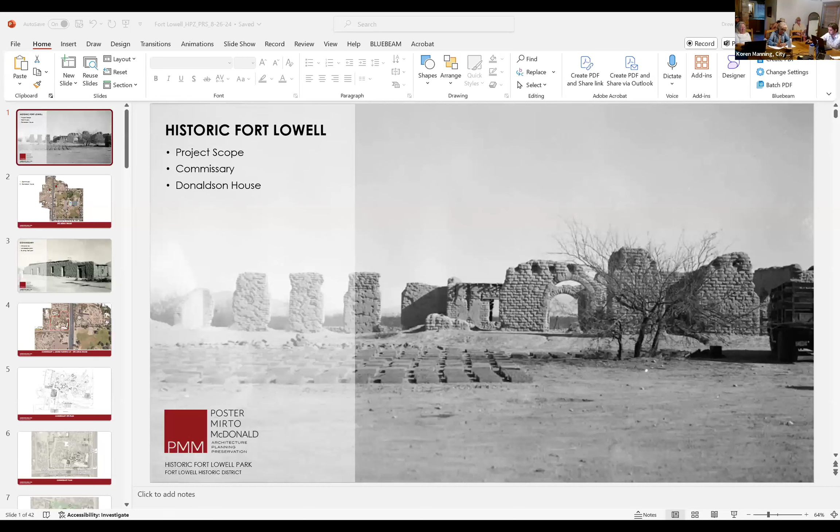Hi, we have someone else who has joined us. Introduce yourself. I'm Julia DeConcini, I'm on the board of the neighborhood association.

Can everyone online hear me? I'm kind of across the room. Yes, I can hear you. Perfect. Should we turn on the bright light? This one? Yeah, pull it. Okay, all right, way better.

All right, we are here to discuss two projects here in Fort Lowell. Poster Mirto McDonald was hired by the city and Pima County in an IGA. The county has volunteered to help out on this project because they have a very thriving historic department, and they've been guiding us and helping us along the path. Both of these buildings are historic and part of the Fort Lowell Park, so they are receiving 407 bond money. The money must be spent on both Donaldson and the commissary to completion, and that is the main focus of this project.

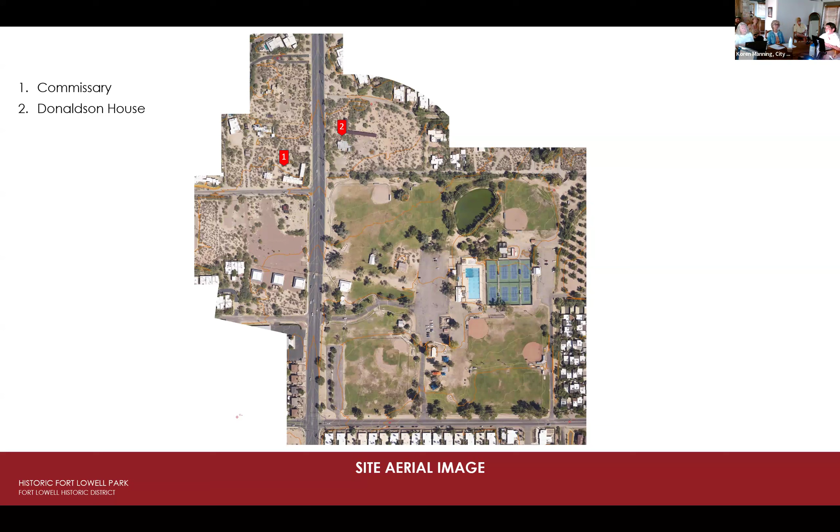It's unknown. The last photos we have in the historic archive are 1977 photos of the Donaldson House. We use that as a basis of design, and you'll see some of those photos in this presentation. We've tracked it up to about 1995, the last time it was used, when it was renovated into a health and wellness center that was also kind of a children's museum, and later moved after this.

So the commissary, we'll go through a site overview, the landscape plans, and the building floor plans with you.

Here's the commissary and its property line. It closes in the Clinco property, which is just north of here. They have an easement along the west side. It's a driveway.

Here's the landscape plans. Part of the design was to keep the integrity of the existing space, but provide a space that could be a community area for future use, having events like weddings, bar mitzvahs, different social events. They could also still be a part of the park.

All the paths you see in this design are maintained, basically what's existing now. The idea is they will create a walkway using decomposed granite, stop people from walking in the already developed desert areas, and then repopulate the desert with native plants based on the Fort Lowell planting guide as well as what's already there.

We're working with Wilder Landscape Group, who's doing this project. In the front here, based on feedback from everyone, we've placed the delivery truck, which could service a future cafe that's unknown. Right now the city has an RFP out looking for future users of this space.

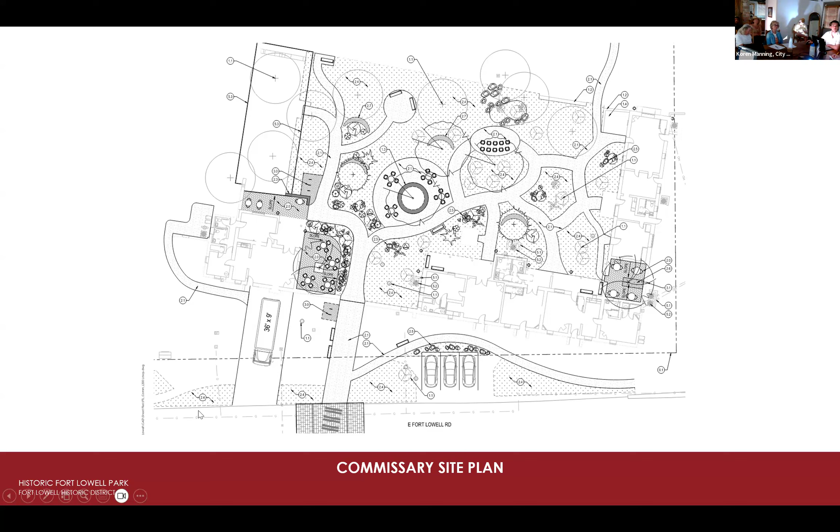Down at the bottom, you can see there's a raised elevated crossing. Unfortunately we cannot get that to line up with the property based on surveys provided by the city's traffic engineers. The raised elevated crossing needs to be located at the highest point along the road, which currently we haven't lined up with our survey based on the information we have, but it's somewhere around this area. We'll see in the next photo.

There's a historic ring in the middle of the property here, and it's a rock ring. Our plan is to maintain this rock ring. It has a date on it, 1949.

Who's the person's name who probably lived there and made that? The tree was living up until 2017. We think the water table and its age just got to it.

Our plan is to remove that tree and put a new tree in, maintaining the ring, but inside the ring we're actually going to dig down and put inlets to bring the water into that space instead of away. The light green represents all the planting that will no longer be walking space or desert area.

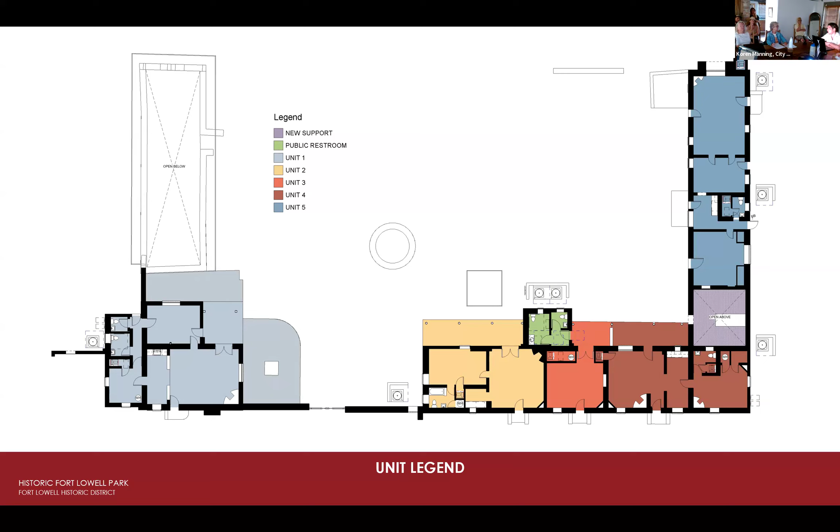So I'll walk through these. This is the ADA restroom, and this is where we'll be making one physical change on the exterior of the building, which is this door in the photo to the right. That door is not wide enough, so our plans are to widen it to meet ADA standards, and we're probably going to change the lock set. Right now, we're thinking we might be able to add material to the door to save it and make it meet our 36-inch requirement.

Does an ADA door have to swing open? It doesn't necessarily push, but it has to have a certain lever, like a hand lever for the doorknob. It doesn't have to be electric. If the city feels they want to do that, they can, and there are wireless options for that.

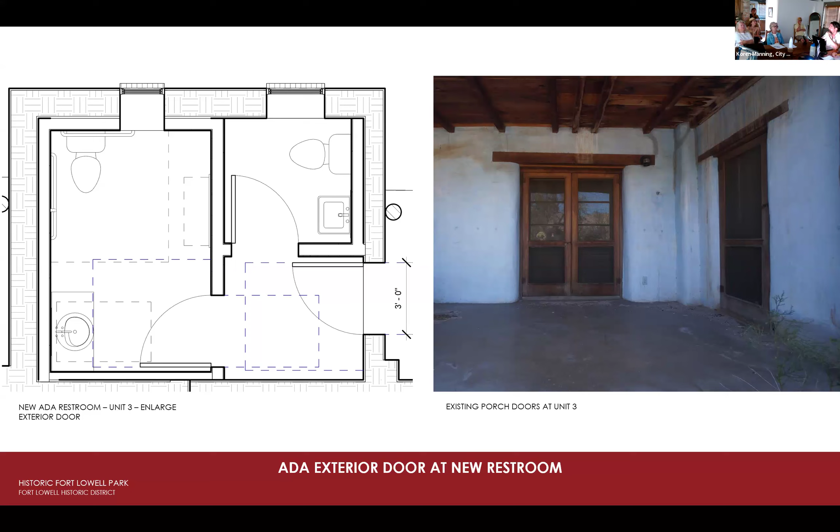So this is where the exterior addition comes in. This is the current structure that's there, which is a lot uglier than what we're proposing—a swamp cooler built on two CMU columns holding it up. Most people don't see this because it's buried in a jungle or desert.

Our plan is to create a small wood frame closet that needs to meet a certain R-value for insulation so the machine works correctly. Then we'll stucco it to match the building, and for the roof, we're going to provide a corrugated roof to match the corrugated roofing we've found in some of our historic photos—the porches in the courtyard had corrugated metal. So our plan is to bring that back, even though the roofs have been redone; they'll just put a new metal roof on there.

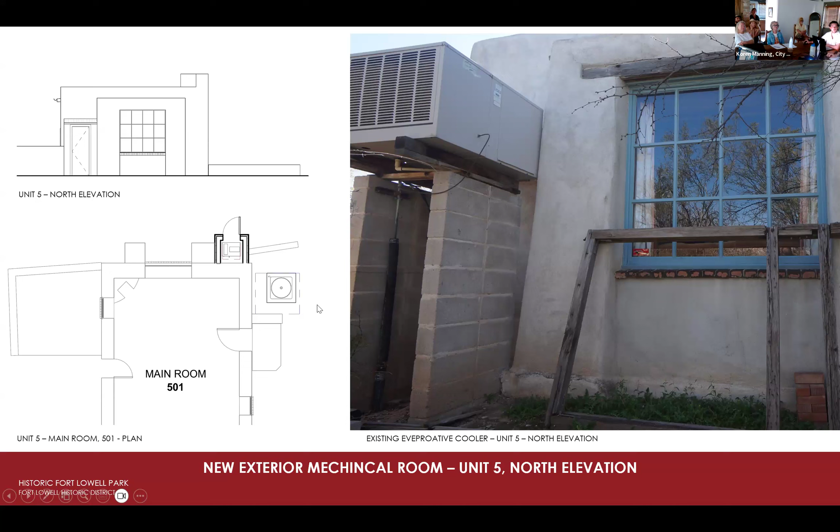That's a priceless picture. Right, this shows the city to some good effect.

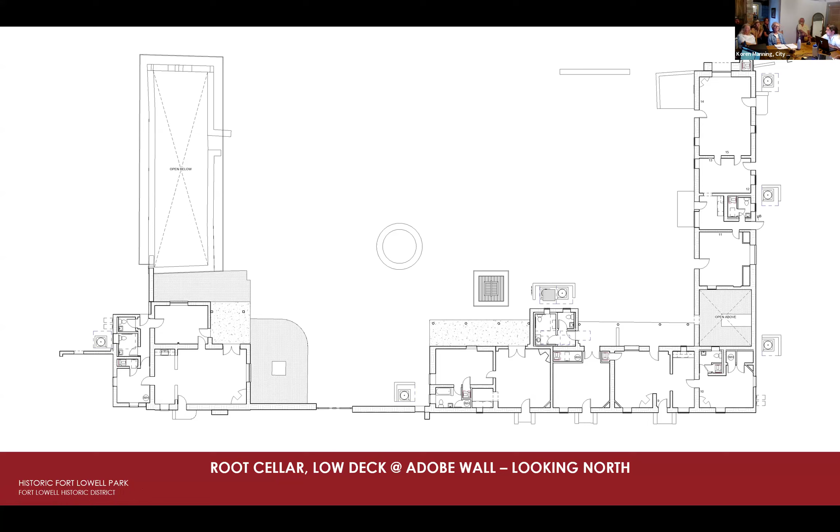I have a couple questions about the truck loading. Back to that, and then David's been... I think we addressed David's. I can answer that. David, that basically got value engineered out of the project, 'cause every time we did an iteration - 25%, 50%, 90%, 100% - the project has been estimated by Durazo Construction. We've done some of the work in the park previously, and that's sort of fine-tuned our scope.

And that's how we've moved forward to where we're at. We're already over budget for both of the buildings together. The city is sort of scrambling to figure out a way to meet these needs, but the parking lot expansion got abandoned. I don't think she's talking about that - oh, you're talking about the truck loading area. No, we were talking about David's first comment, the parking question.

So then how do we move forward if you don't have parking? Well, we have the whole city park too. The city has parking requirements, right? Do they have parking requirements adjacent to this? This is a very complicated permit project. We're getting permitted by the county - the only section of this that's been permitted by the city is through this historic idea. So you have to go talk to the county, and the county would approve using the lot crossing and the parking.

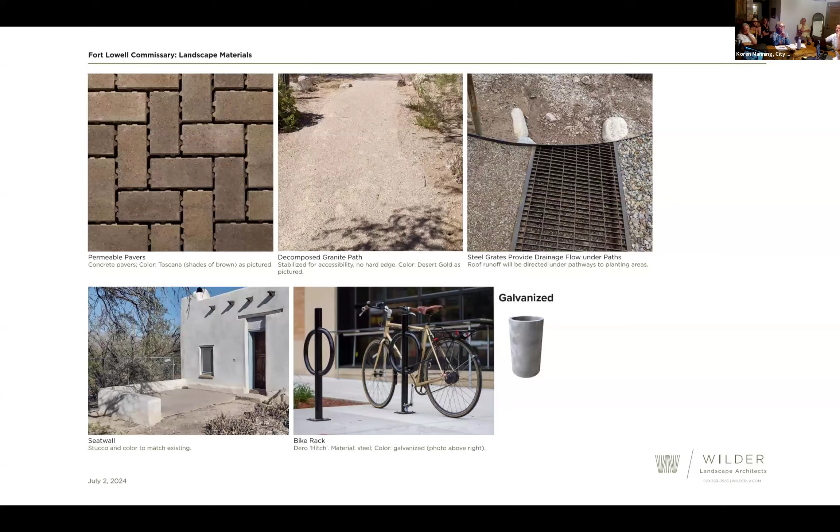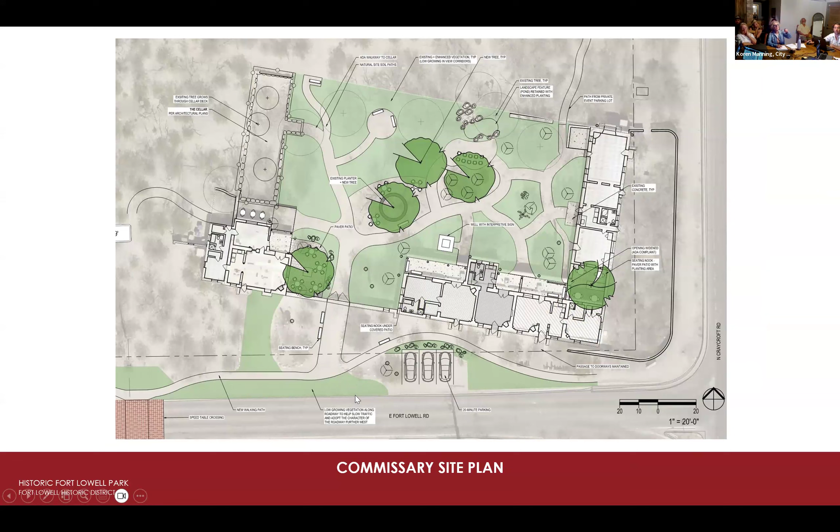That is the main, this will become the main foot traffic, pedestrian. You see, the landscape architect has separated it from the road using a green barrier, which is the plan, by pulling the walkway back from the edge of the road. This is an earlier plan, the plan with the drive off to the side.

Right, it's changed, so now it's a direct access across Fort Lowell to that pedestrian entrance. This is gonna change based on what we've gathered in the past two weeks—it's gonna end up further, being here, but then they'll use the path and come in that main pedestrian entrance. It'll be kind of this nice walkway with the landscaping to enter.

And this goes out to y'all—I just have a feeling that the drive access for the delivery truck could still come off to the side as opposed to being on the front. And yeah, it might be 15 minutes, but I leave it to my colleagues, there's 3 of you here. There's 2 components, and we need to—any other discussion about that?

None, Dave doesn't have anything. Margot, nothing. Well, what were you saying, the very last part? You heard the delivery on the side where it was originally proposed? Yes, to keep it there.

And if you look now, the delivery truck goes over the walking path to the building, and instead of being off to the back, the parking lot goes over the walkway. The existing parking lot on the south side crosses the walkway—yes it does—but it's the one on the north side that I was considering taking into account.

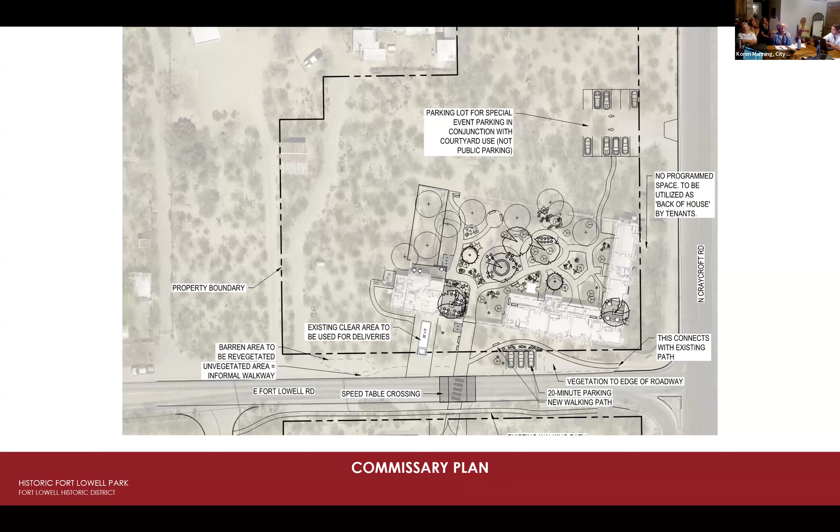If I could offer some additional information, not an opinion: there is a mound of unknown origin that sits essentially under the area marked 'clear area.' It's raised about 2.5 feet. Mounds on historic sites usually are not something we want to mess with, so putting a driveway through that area would take some research.

According to the Atkins white paper, this spot is the trash site. If you go in the back and look at this adobe wall melting away, there are pottery shards coming out of the wall. Whether they used dirt from that pile to build this entire building, I don't know, but putting a driveway through there might entail a 3-month archaeological excavation that would slow down everything.

I think it's important to consider preservation of the landscape as well, not just structures. Preserving the landscape means leaving that open spot there, even though the desert back there could easily be modified. We can vegetate all this, but preservation doesn't just include structures in my mind, it includes everything around it. Agreed, and that's the basis of the current scheme.

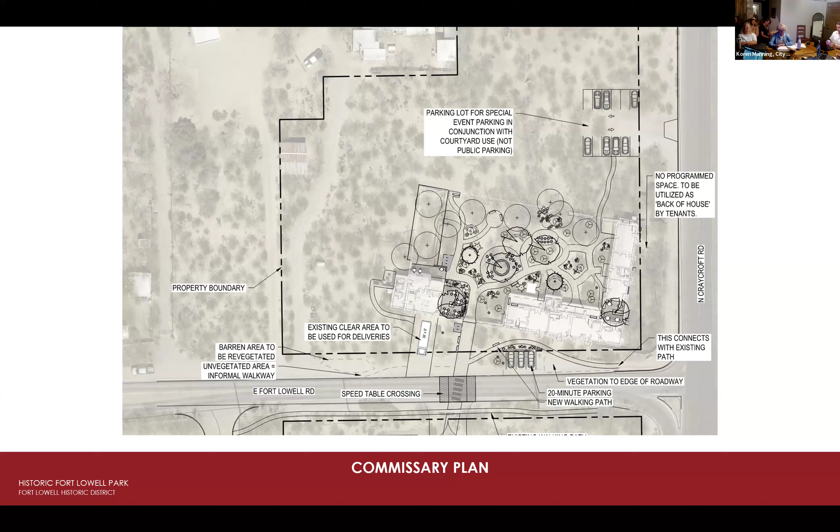We can do a vote, unless you want to discuss further - that's up to you. Anybody want to discuss this? I don't. Okay, all right. David, in favor of this? Yes. Margot? Yes. Rich? Yes. I'm in favor as well. So it passes unanimously.

You didn't like my wishing well, though. Didn't get in, did it? You did - if you know it's gonna work, they're gonna throw money in.

Just keep going. Should I do the lights again for the Donaldson House?

I'm sorry that we have to leave. Thanks for letting us sit in - I'm sorry you do too. We're just with our kiddos, so thanks for letting us sit in. We'll connect to the Zoom and catch up with the rest of the meeting, and appreciate your input very much. Thank you for all of your thoughtfulness. It's on recording if you want to listen to the whole thing again. I will, I'll listen to it and take notes, on repeat. Thank you.

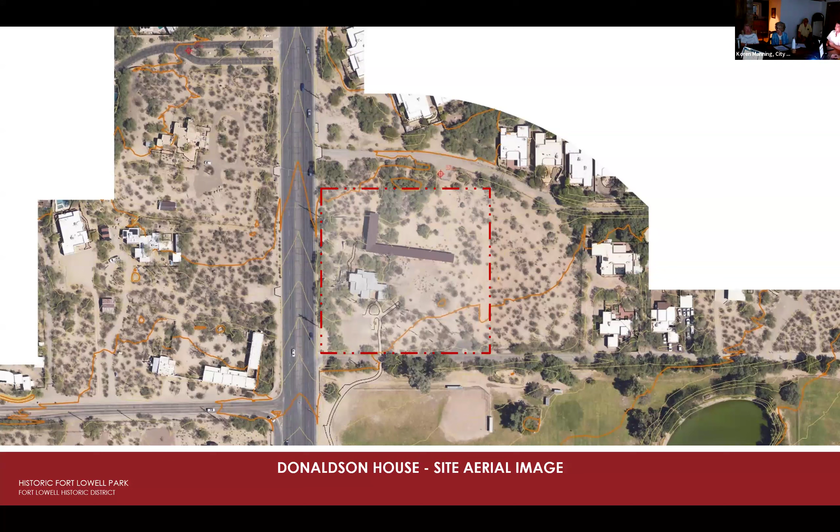So here's the site - the Donaldson House sits on the site with the historic corrals in the back, which is the L-shaped ramada. That ramada overhangs the existing, or what's left of it, adobe wall. Just so you know, that is part of our scope of work - to do a sort of sacrificial plastering of that wall. I'm an architect, so hopefully it's not religious.

It's sacrificial. So here's the current plans for the new scope of work. This is an existing parking lot - the lines have surely faded away, but that's what's there. All the walkways are pre-existing. Everything on the site - there's not much changed on the site as a whole.

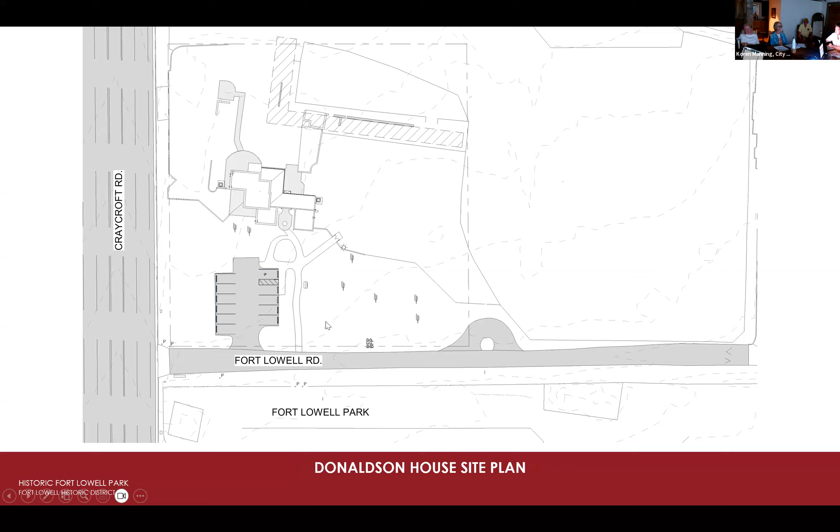So the vision was this was the Hardy Donaldson house, and the plan was to renovate this into a set of office spaces. Those of you who participated in the RFP or RFQ know there were some questions about it being used differently, which the city had agreed to. But the plan is just to provide office spaces and comfortable outdoor spaces that exist in the back.

The plan with the landscape architect was basically to leave it untouched. There's so much growth in the back that we're actually going to use selective removal. There are a few non-natives that have found their way back there that we'll definitely remove. There are quite a few existing dead trees that we're planning on leaving, as long as they're out of harm's way, because they still provide a natural space for birds.

The main issues we have with the site—we've done a hydrological study—are that the water from the park is supposed to cut through this walkway, run along the edge into that small grate there. Over time, we're not exactly sure if it's a combination of the surface changing in the park as well as the storms we've been receiving getting greater, but we now have a large sheet flow that moves this direction across the site. It bottlenecks in the back, runs through the back, and has deteriorated all of the walkways. We'll see that in some of our photos.

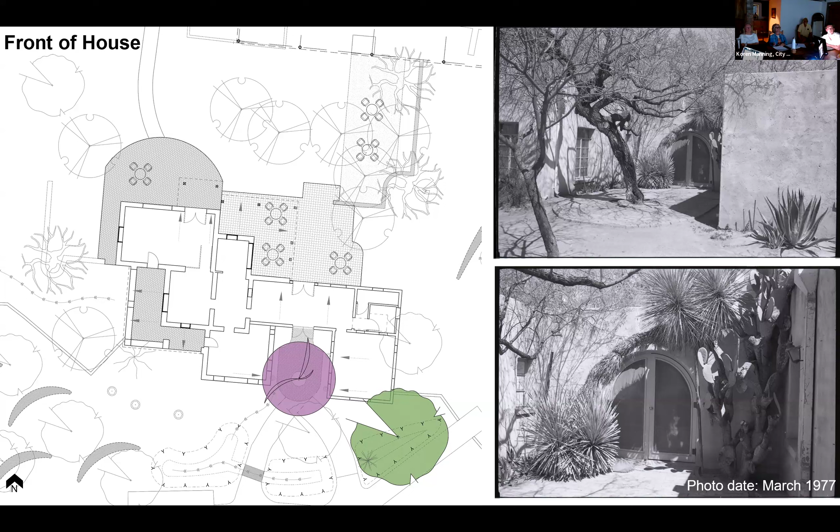Those are the two trees we'll be adding to the front. Here's the existing condition, as you can see—the water getting trapped in the courtyard has badly damaged that east-facing wall.

Is the original door behind the boards? That is the original door. Yeah, so the original door was actually, we think, swung in, and it also had a set of screen doors. Our current plan for this door is to treat it as kind of a gate or shutter, and it will remain there. We're going to create a frame so it doesn't fall apart anymore, with a top metal edge to protect it. The idea is that when the space is being used, the doors will swing open.

They'll probably lock in place with some kingpins, and then we're going to design an arched door to fit inside of that—a little more modern, because the existing door doesn't meet the correct height, which is 6'5", and we're required to have 6'8". So this is something we're bringing to the design review to try to encourage them to allow it.

We have two other doors on the front facade under that porch that meet the requirements, so they could be used as ADA access, which might require us to create some kind of path to that porch. But most likely, the height doesn't really affect the ADA person—it affects tall people.

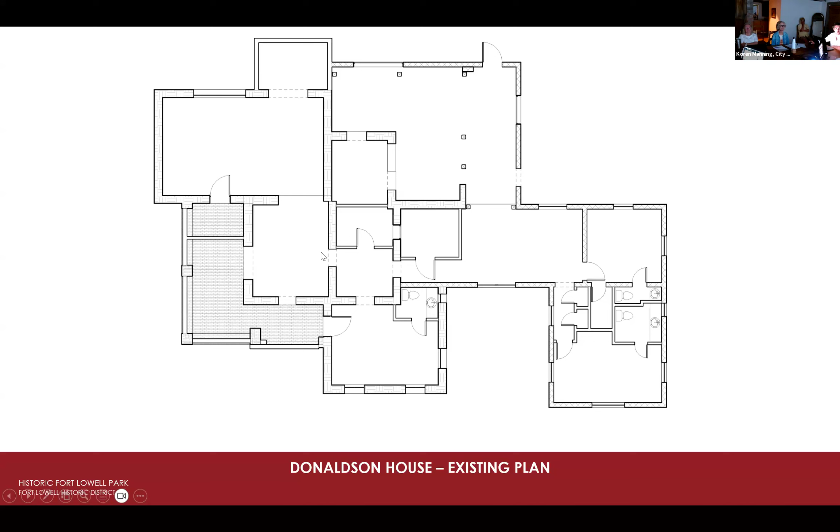And this was the kitchen. So our plan is to remove this CMU wall, which I'm guessing was built in the 70s, to open up this original porch once again. And this will become the back door, so when you walk in, you'll see back into the back patio and the porch.

This was an overhang porch that then got closed in. It's a framed section and it's just rotted away and disgusting. We're going to remove that too.

So the north, this is north, correct? Top, yes. This is the part that has that cool arch door, where is that on here? That arched entry, right, okay. So this is the south, this is facing the park. Yeah, sorry, I didn't have... That's okay.

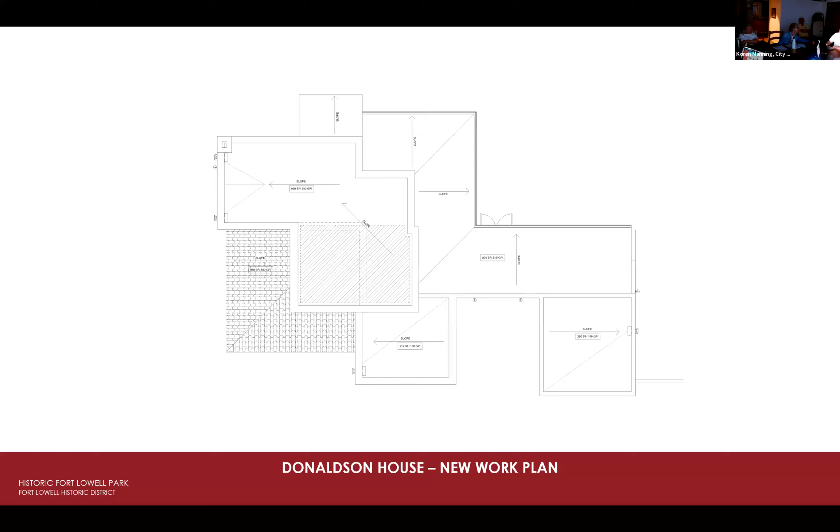We need to fix this wall that's failed along here, I think it's 20 feet, and then there's a section right here that's failed too, that we anticipate fixing. We need the water to come out of Fort Lowell Park and go along the alignment of Fort Lowell Road to Craycroft and stay away from our site.

Is there anything we could do to help you with that, as a historic district board or neighborhood? We probably could eventually, but not right now. The other problem is they're not willing to just go in there and dig because it requires an archaeologist, and you've got ruin walls along that edge, on the corner, all the barracks.

And trash pits. So I wanted to ask a question about one of the comments you made first. Do you think that original adobe piece was part of the fort? We don't know, we sort of suspect it would have probably just been like one room. It could have been a storage space.

We know the stables part, do you know? Yeah, John Donaldson, we've done an interview with John Donaldson. He said part of the house was there when they bought it. I believe those were something like that. I mean, it would make sense, it's right near the corrals, which we know what they're for.

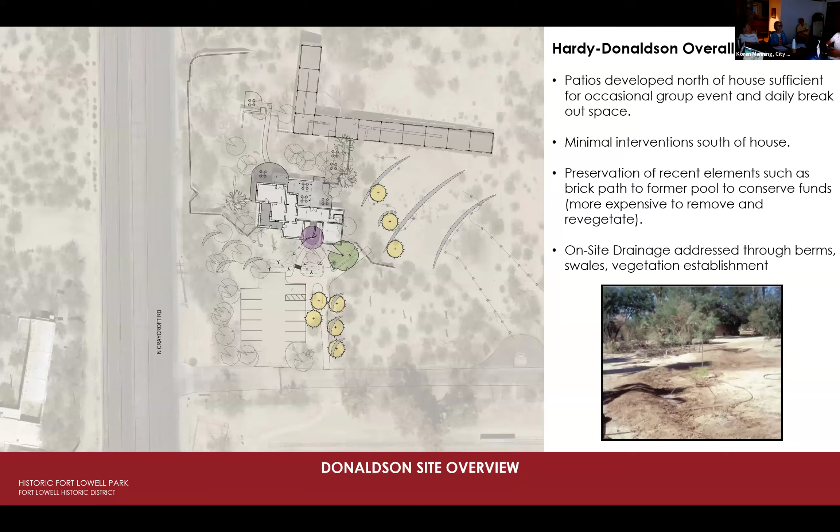The doors and windows - do you have samples of doors, windows, and colors? Let me show you this. We have all the existing windows right now, everything's in there. The only ones we don't have - let's see - what's that one window, these two? So those are the examples of the two windows we're bringing back.

And this window here, we actually still have the frame, and it was just a fixed glass. Then this spot right here, there is a window - that is a historic window. It's sitting inside the building, and we're just gonna reuse that and put it right over the sink where the doorway is.

This actually, there's a window there, so our plan is just to put a fixed window that matches this one. But all of these are steel around the whole building - this is all steel.

The fixed picture window, the one that's on the bathroom - yeah - and that you're gonna replicate again is not on the kitchen? Oh, it's a kitchen. It's just a frame, wood frame that was there, and it's the original. With a frame? Yep. And how big is that window? Not very big, I would guess maybe 42 inches wide by 24 inches high.

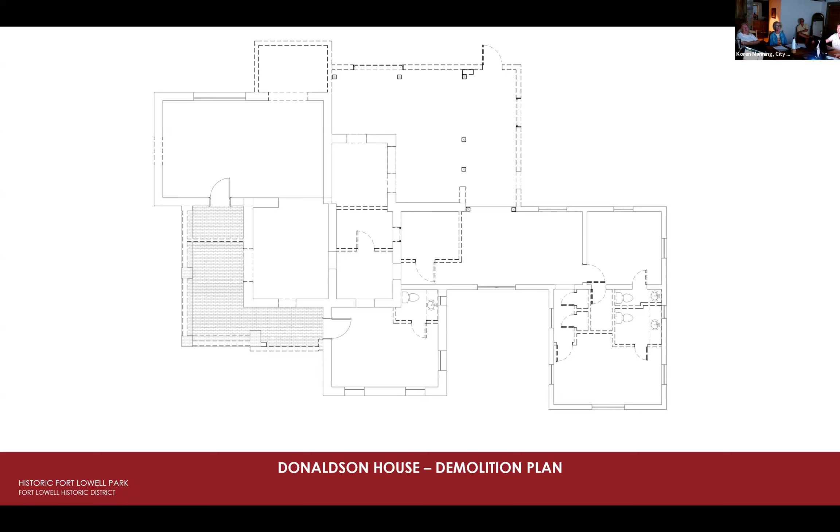So I think this is a little challenging because there's some details coming up in the design around the front door and the windows. The front door is the only new thing we have options here, and like the kitchen flooring system, just the actual visual design details and choices.

What do you mean by the flooring system? Well, like you said, we haven't picked one, but we're gonna pick one. We're gonna figure something out for the door, but we haven't quite decided what we're gonna do yet. And for me that's okay, I just feel those details should be coming back to the board when the time comes. The board is here specifically to be approving these minutiae and details for the building, so yes, the overall plan with opening up the porches is working, but it was really hard for me to understand what type of window was going in, and now that's also getting replicated in another window.

Fair. These plans are so hard to read because they're meant to be printed on architectural drawings I think. So what page, is it one of the plans 600s? Is there a way we could put it online so you could bring it up?

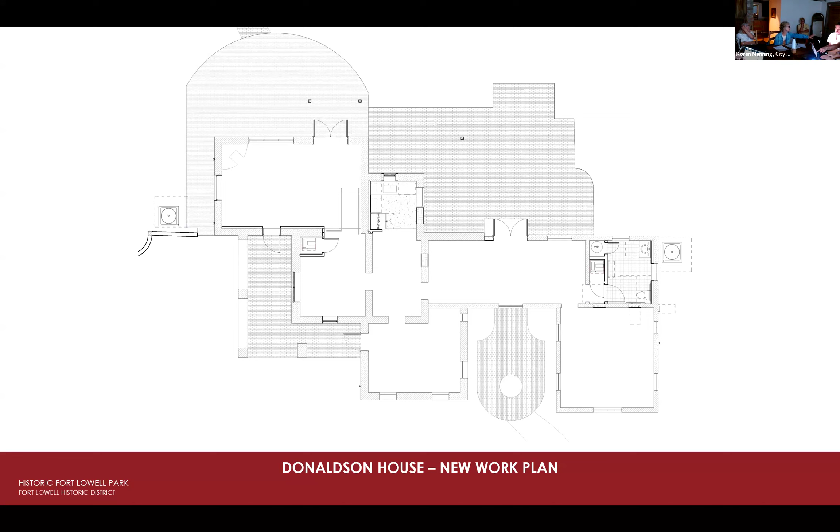And I have to say that, given they're not changing the exterior door, I kind of don't care what they do on the inside. I'm not very concerned about the floor coming up because it doesn't change the exterior and what I'm gonna be seeing. This is a public building so I understand the inside is part of our purview. I understand, I'm just giving you my frame of reference, and I think the window becomes a key piece, but if it's been there...

I think it's the exterior doors. What are the other exterior doors? Okay, so some of the doors are... you bring those up, yeah I'm working on it.

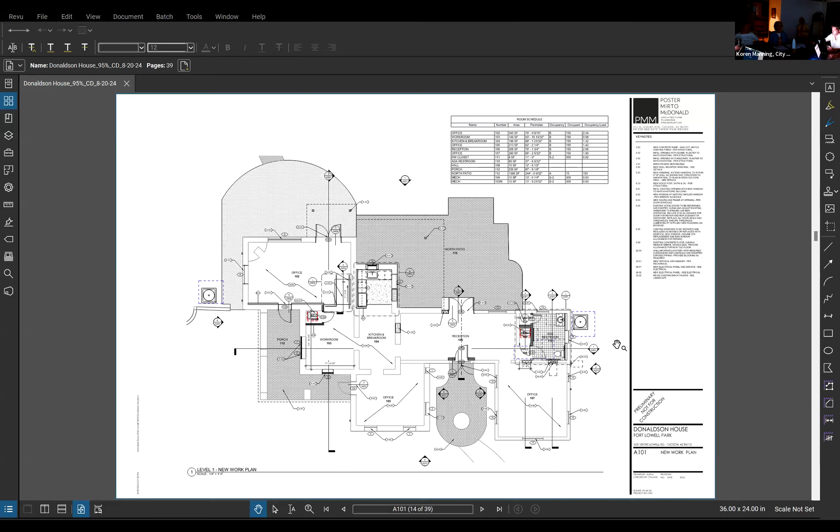You guys are putting us to the test with the double submission, with both packets being enormous.

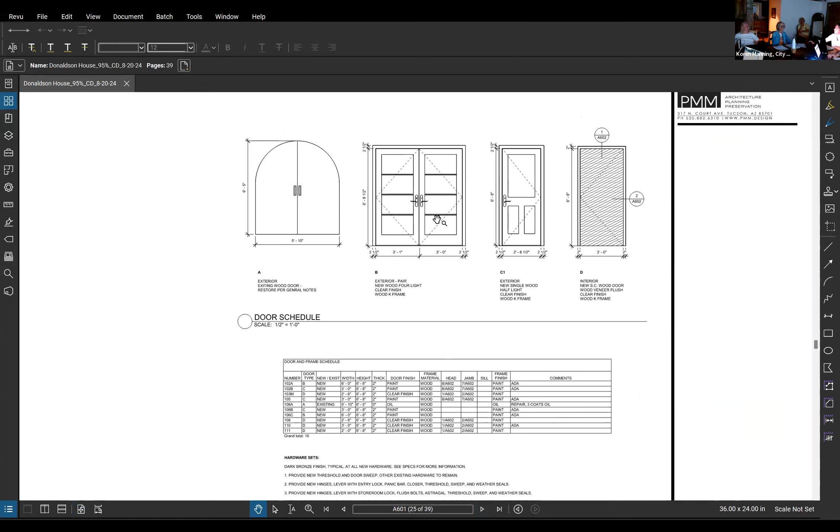So these are the doors. Choices are single light on the single doors and then a 4-panel light on the back door, 2 back doors, because they both face north. So the north-facing doors are like French doors. And when you call it a single light, I don't know what that means. Single light up above, there's one glass window, a glass pane. Okay, and the one on the far right is the bathroom door, an interior door. And then the arch door.

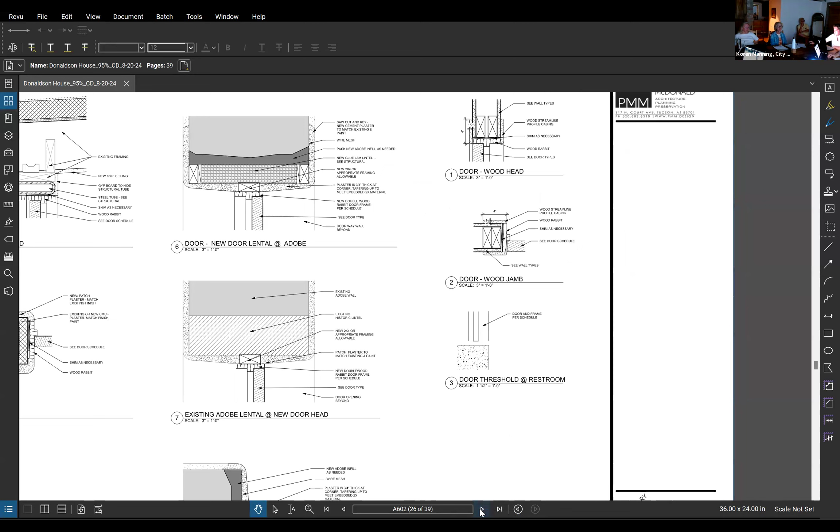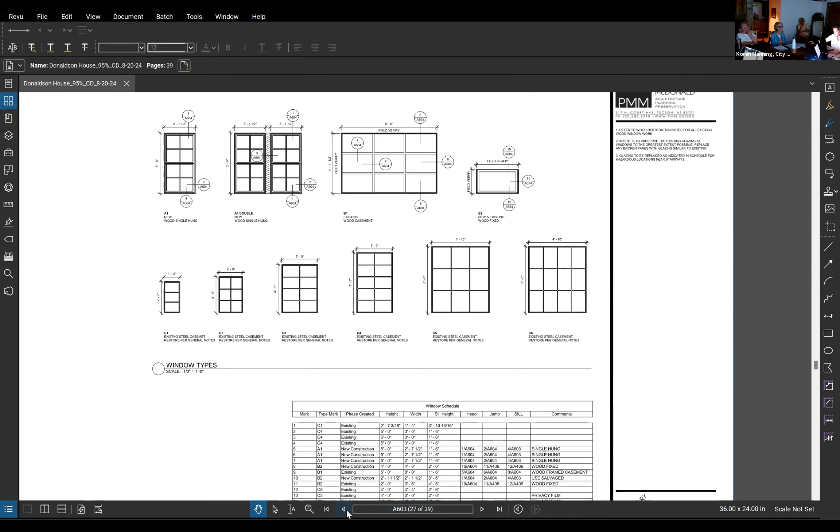There's a door here, I don't know why it's got cut off, but the door goes to the same height as the window. And then the window's actually up at like 48 inches, and it's gonna be a non-operable wood frame window.

Well, we have the frame, we don't know what's there. It looks like it was a fixed window going into the wood frame that exists, but it's planning to not replicate the proportion, you almost never see windows wider than they are tall. Do you think it was a hole for heavy equipment at one point? No, it's detailed out with two pin lines through all the woodwork, and it matches with the whole frame of the door.

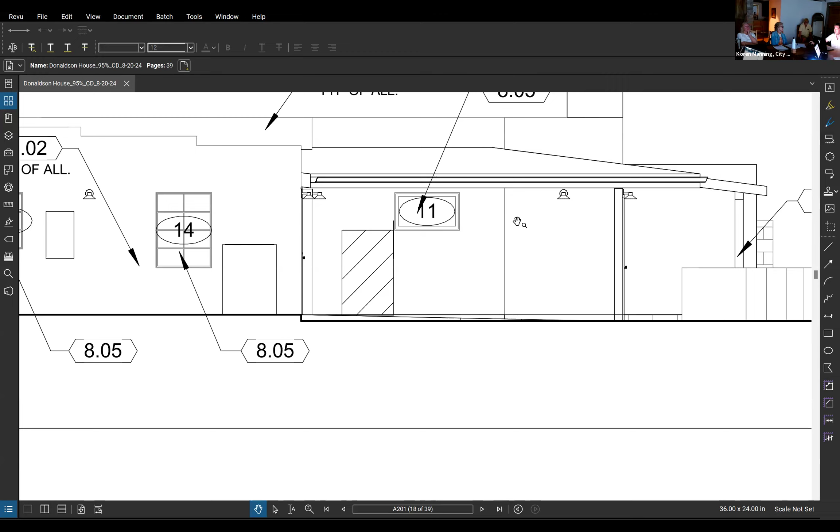And then this part, this section, it's up here.

If you look at this section, it's tagged as the 1948 section. So somebody went through who knew something about the building and marked what was original and what wasn't, and gave time frames. I think this section is too, but what eras those were actually built on.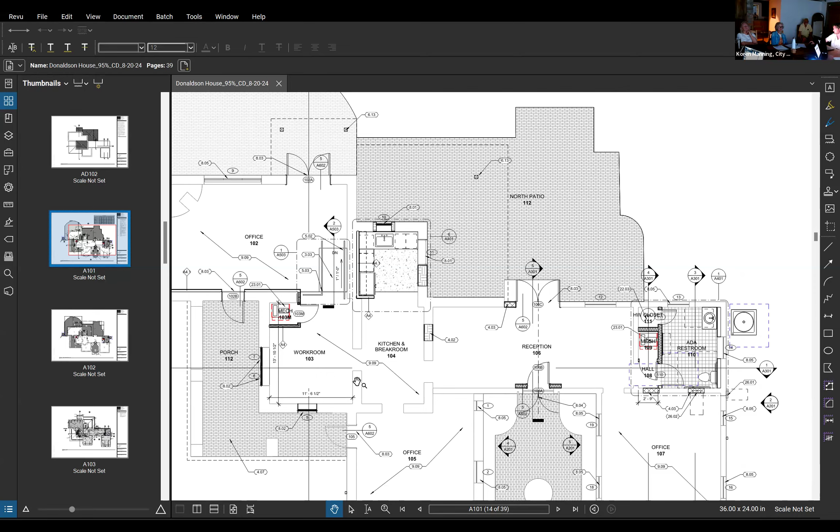And the only floor that you're changing is the kitchen floor, because otherwise you'd have to change everything since it's destroyed. Our goal is to maintain the concrete. We may select a flooring for the whole space because it's an office space and we'll be using furniture and various things in there, but currently it's to maintain that. We have a keynote in our drawings to withhold a certain amount per square foot.

Is this board concerned about the choice of flooring? Your choice is to maintain what you've got, knowing that if it's not good for someone, you'll do something different. We also have some issues right here, there's gonna need to be some grinding done because there's a slight level change, but more than likely the concrete could be ground out.

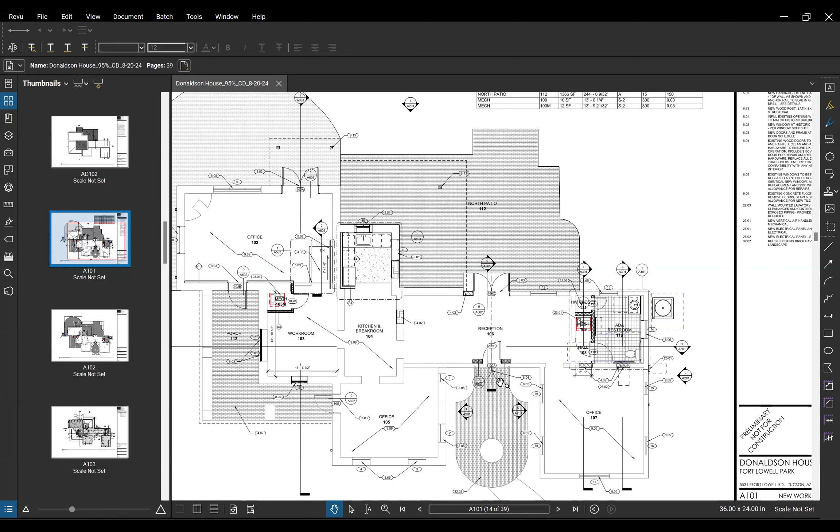And is there any discussion of that recommendation? I would say not to suggest, but just to note corrugated is appropriate, or find another type of solution for the guidelines.

What if I find an old photo? An older photo that has clay tile. There's some clay tile, I mean, clay tile was really added, probably I bet it was added in the 50s or 60s, because that was kind of the MO around here. That's when the whole flat section of the building was created.

This whole section, do you know when that porch was added? The porch, you don't know, but this section, using aerial imagery, appeared somewhere in the 60s.

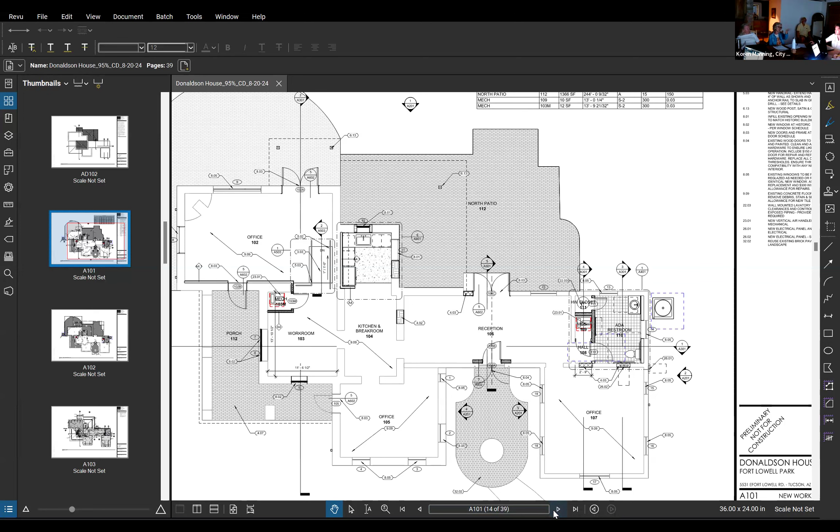If the back patio roof is that rolled white, yes, I would prefer corrugated first, but rolled white would be my second choice, just to tie it together instead of clay tiles, those red ones. We weren't putting clay tiles on, just on the front. So, but to put what's on the back on the front, or if we want to go with a different look for that front patio, I think that'd be great.

Okay, so anyway, any other, so the recommendation has been to make it, more than a suggestion, to make it a recommendation to change out the clay tiles for appropriate roofing materials for the Fort Lowell historic zone. Yeah.

So with that change, do you agree for that amendment, David and Margo? And what are they gonna use something appropriate, and not clay tiles? Okay, but are they gonna come back and let us know what they're planning on using? I think they know what is in the design and they know what we've discussed, which was the rolled and the metal roofing.

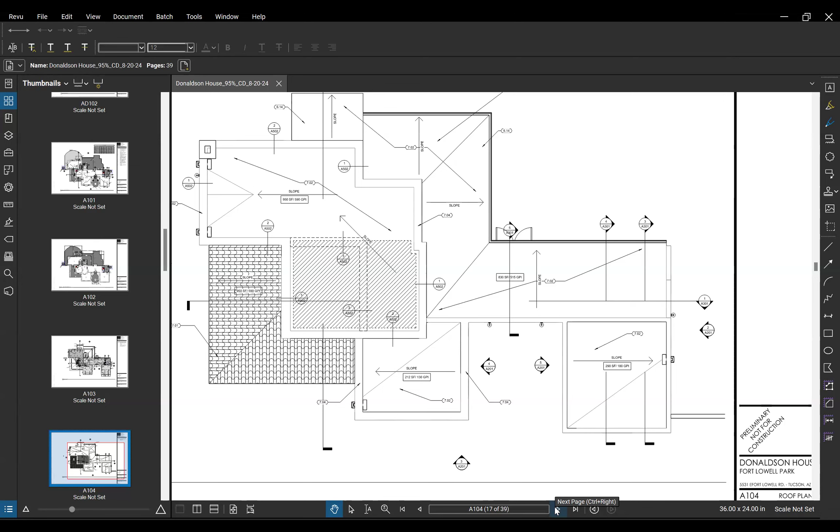Is there a motion to approve this? I put forth a motion to approve. I approve. Okay, and is there a second? Mary made the motion and Margo seconded. We're seconded? Okay, so we're just voting yay or nay.

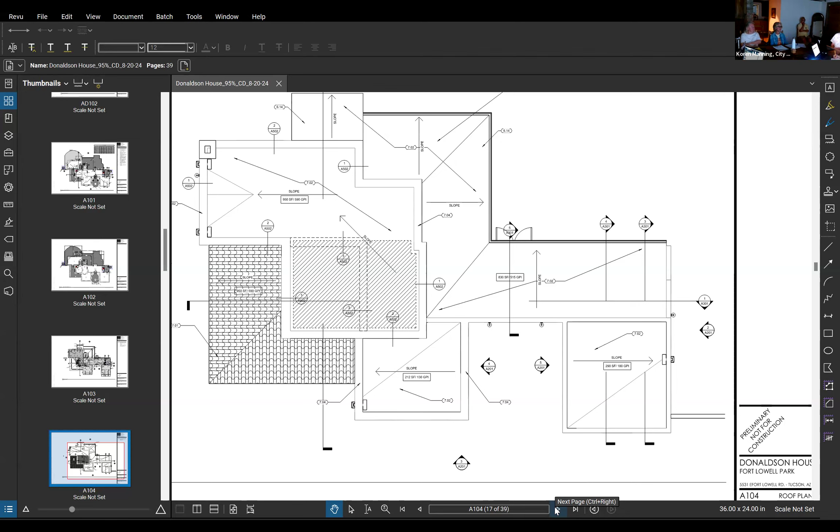Cool, go Margo, yay or nay? Yay. David? Yay. Briggs? Yay. Yay from me as well. Good job, thank you. Thank you. Awesome. Thank you for all of your hard work in developing this neighborhood.

Shall I? Can you reach it? No. Oh, thank you, thank you. Thank you so much, appreciate it. Thank you. Thank you. We have a couple other orders of business.

The design guidelines, and I don't know that we have the stamina for that tonight, but I do have a question, a processing question, and maybe you can help me with the process. Do we go into executive session to discuss the design guidelines as a group, or do we always have to have it as an open meeting?

Like the mayor and council, they go into discussion to come up with it, and we would really like to be able to do some of that. Right, yeah, I think we discussed this previously, which is that executive session is really only for legal and financial matters, very limited, what mayor and council is even allowed to do in executive session. So advisory boards, for open meeting law, I don't know what sort of items would warrant that.